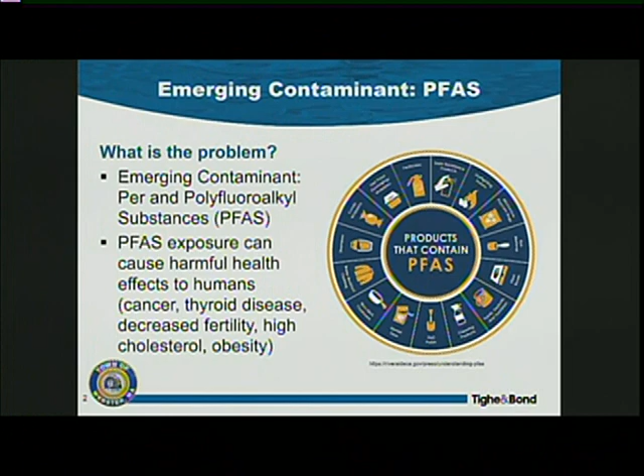Massachusetts has drinking water regulations for these substances found in drinking water, and that regulation limit is at 20 parts per trillion. To give you perspective on that number, a part per trillion is one droplet of water in an Olympic-sized swimming pool, which is 660,000 gallons. So it's a very, very, very small concentration that we're trying to detect here.

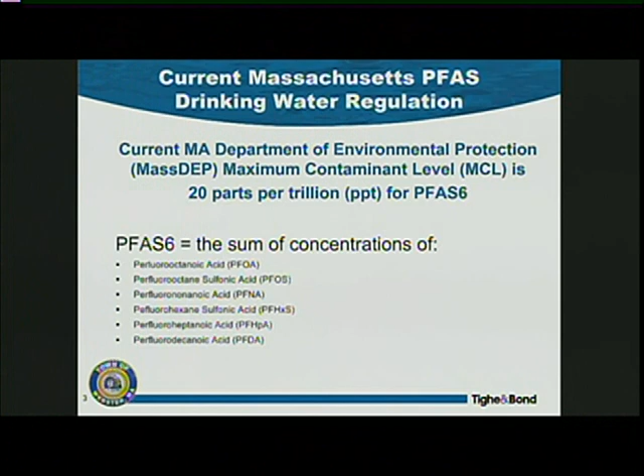For Massachusetts, the 20 parts per trillion limit is the summation of 6 specific PFAS substances, and there are thousands of these substances, but Massachusetts is currently just regulating the sum of 6 of them.

EPA recently came out with a proposed national primary drinking water regulation, and that was in March of 2023. As you can see from this table, there are 2 compounds, PFOA and PFOS, for which the proposed maximum contaminant level is 4 parts per trillion. That is significantly less than Massachusetts' current standard of 20 parts per trillion. But also keep in mind those are single substances, not the combination of all 6.

The EPA proposed standard also has a hazard index of 1 for 4 different PFAS substances, and those are a health-based related fraction, so it's a calculated MCL. Those are proposed to be less than 1.

These proposed regulatory limits set by EPA are currently open for public comment, and that public comment period will be ending on May 30th, 2023. We anticipate that it's probably another year before these regulations become finalized, at which point Mass DEP will then update their maximum contaminant levels, and those will be at least, if not more, stringent than what EPA's maximum contaminant levels are.

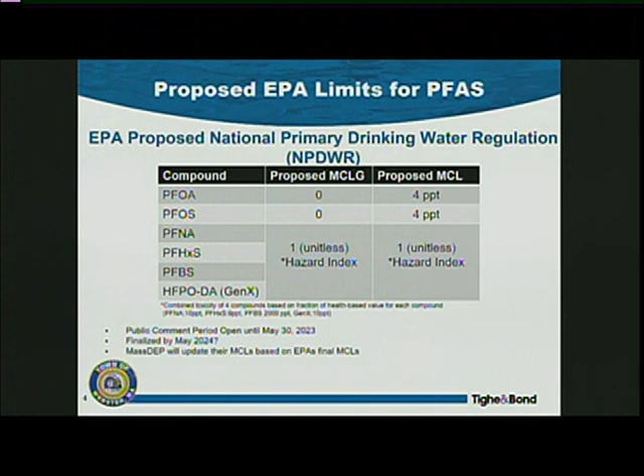EPA's current standard for PFOA and PFOS is 70 parts per trillion, which has not been exceeded in Webster, but Webster has exceeded the maximum contaminant level for Mass DEP at the Bigelow site in the raw and finished water.

But that well has been offline since August of 2022, is that correct? Correct, yeah.

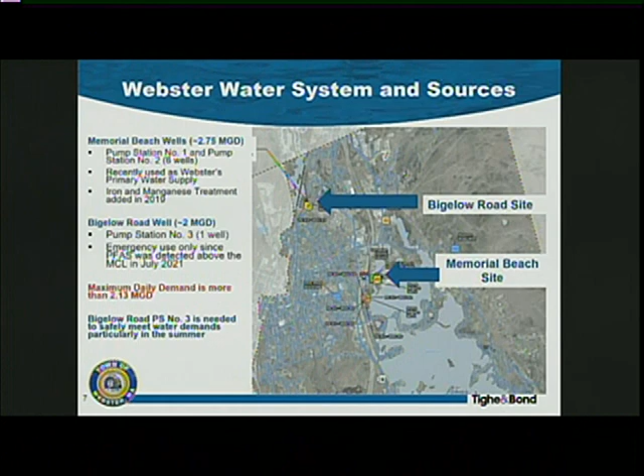In addition to PFAS, there is also iron and manganese at higher levels at the Bigelow site, which currently doesn't have treatment for iron and manganese. These are 2 common elements found in the Earth's crust, classified as secondary water quality parameters.

Iron and manganese in dissolved form, when they oxidize, cause precipitation, resulting in discolored water and buildup on fixtures. Currently, the raw and finished water exceed the manganese secondary maximum contaminant level of 0.05 milligrams per liter, but it is below the iron secondary max contaminant level of 0.3. Iron and manganese would need to be removed prior to PFAS treatment at the Bigelow site.

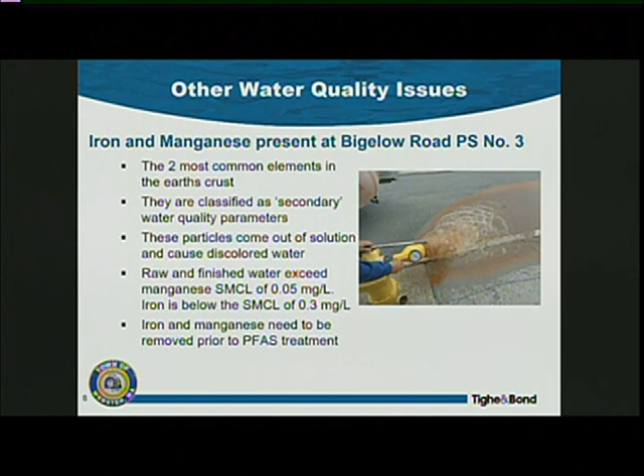The plan is to construct 2 water treatment plants, one at each site: one at Memorial, adjacent to the existing water treatment plant, and one at Bigelow. That also includes iron and manganese pretreatment.

The method of treatment for PFAS that we'll be designing for is granular activated carbon. With this method, the water will pass over the granular activated carbon and adsorb the contaminant, the PFAS.

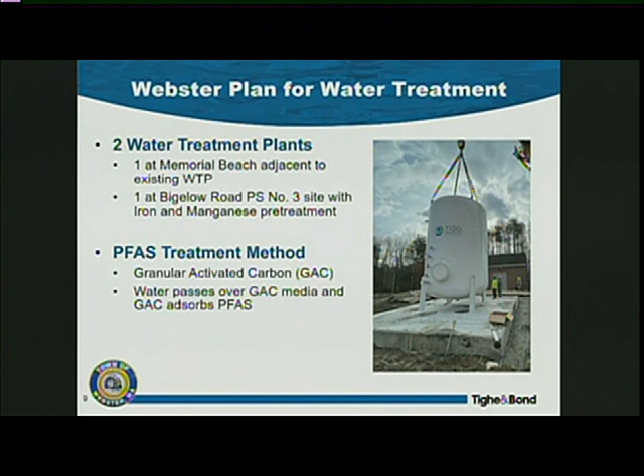Bigelow Road will have removal of PFAS as well as iron and manganese, and will provide the necessary redundancy for the town, especially when water demand is high in the summer months. Memorial Beach water treatment plant will be for removal of PFAS.

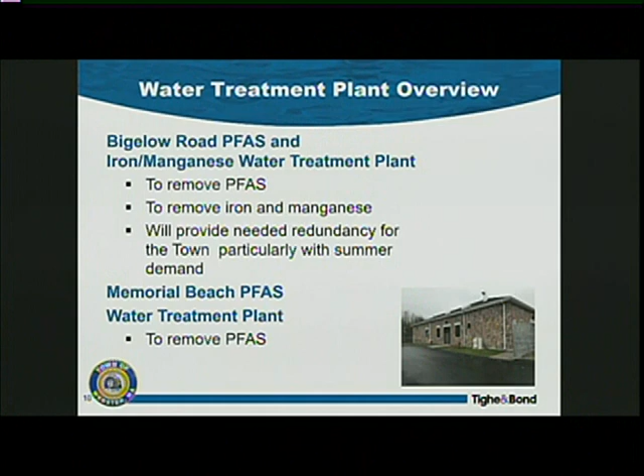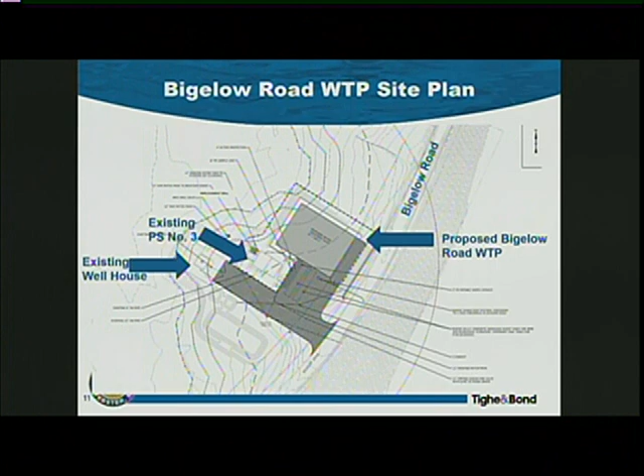There will also be some underground tanks for backwash wastewater, and we'll also be installing a new replacement well for redundancy in order to get that capacity.

These are a couple renderings of what the proposed plant might look like. We have a couple of elevation views, and on the upper left corner, you can see the new proposed building in relation to the two existing buildings on site.

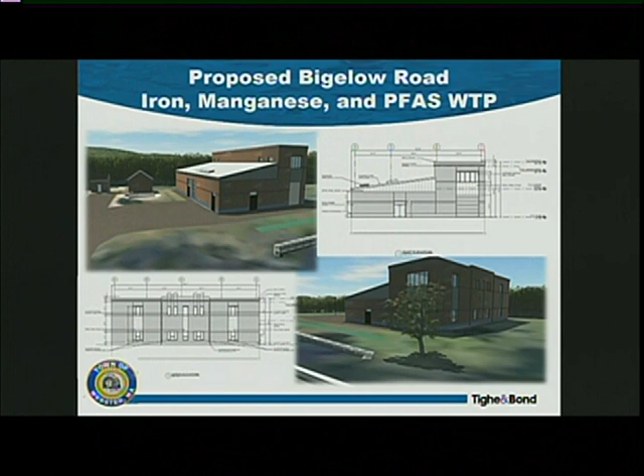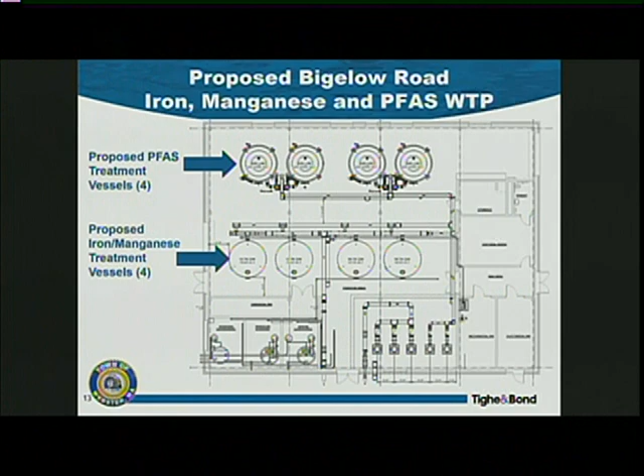Here's a proposed site plan and floor plan for the new building. Prior to entering this building, water will go through an aeration tower that adjusts pH prior to the GAC filters. It will go through the green sand, or biological iron and manganese filters, to remove the iron and manganese, and then travel through the GAC filters for PFAS removal.

This is the proposed site plan for Memorial Beach. Again, the gray rectangle is the proposed new building, and there's an arrow showing the existing building on site. Those rectangles in front of the building are for stormwater controls. They'll collect stormwater from the site, but will be installed below the driveway, so you won't be seeing them on the site.

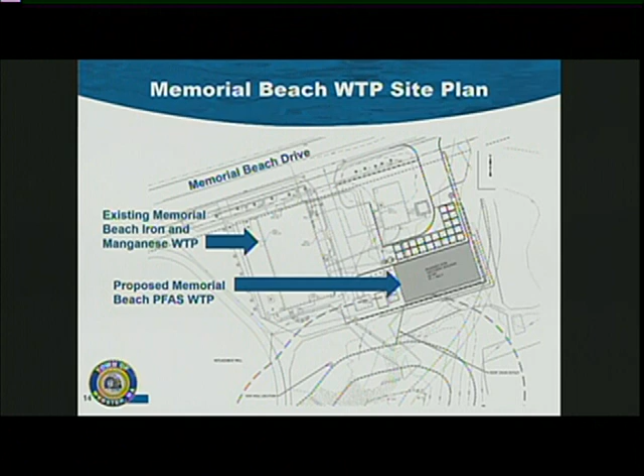Here are a couple renderings of the proposed building in relation to the existing building. The PFAS filters are a lot taller than the filters needed for iron and manganese removal, about 28 feet. So you can see the building height is a little bit taller compared to that existing structure.

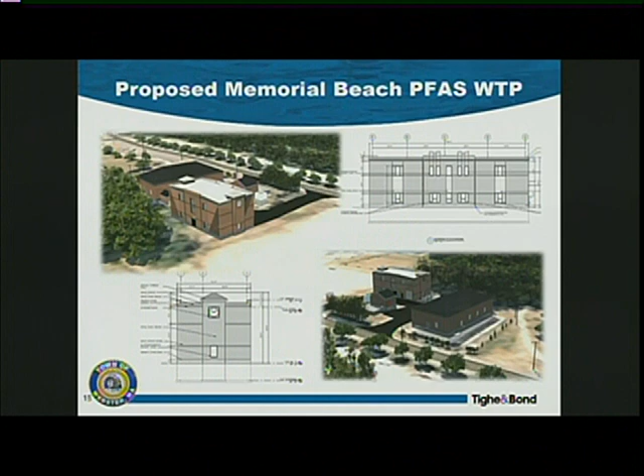The proposed Memorial Beach floor plan is a lot simpler because it's only for PFAS removal, since the site already has iron and manganese removal. So we'll be using the existing facilities for the packed aeration tower, followed by the green sand filters, and then through the GAC filters before it goes out to distribution.

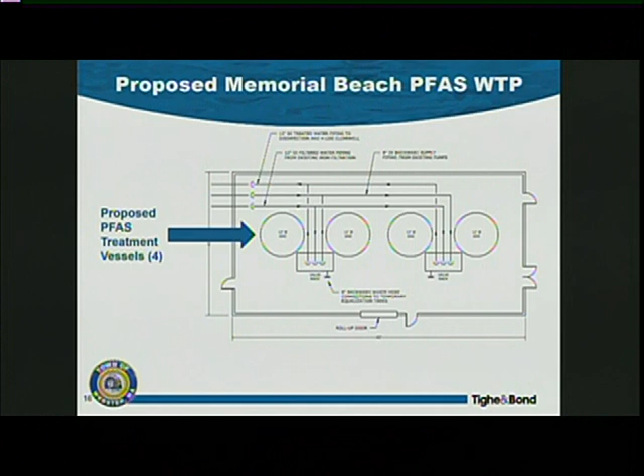As I mentioned before, the treatment technology for PFAS that we're looking at is GAC filtration. These filters have been installed and are currently being installed in several surrounding communities, including Dudley, Townsend, Dracut, Littleton, Tyngsborough, Acton, Groton, Pepperell, Hudson, and Stow.

The other technology we're looking into for iron and manganese removal - there are two options we're considering now: Greensand Plus filtration or biological filtration. We are currently doing some pilot testing, which is actually going to start next week, to determine which one is the best option for our water quality.

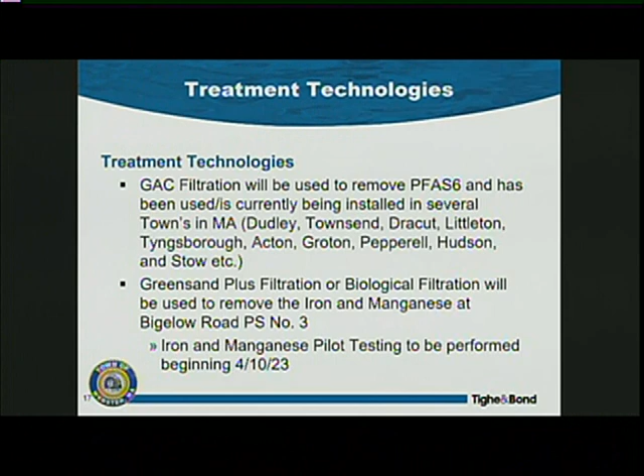So the project funding approach - we submitted an application into Mass DEP State Revolving Fund. Webster did make the draft intended use plan for this project, so it is proposed to be funded through SRF. The SRF loan is a 20-year construction loan with 0% interest, and there is the opportunity for principal forgiveness, which we believe right now would be a minimum of 19.8%.

We won't know exact numbers for some time, but we are currently awaiting the final IUP list to be drafted. And Mike will be presenting on the water rate study after this presentation.

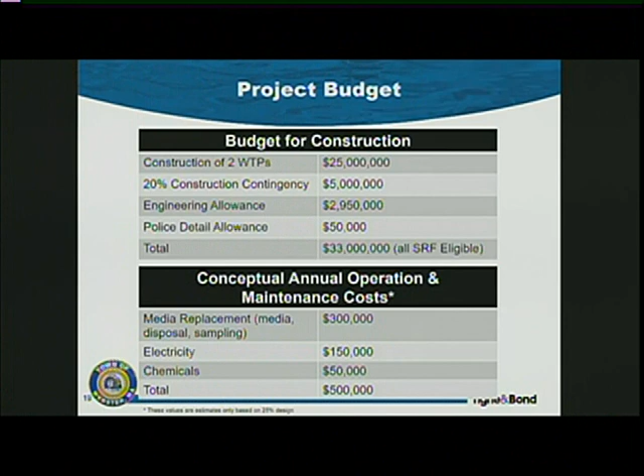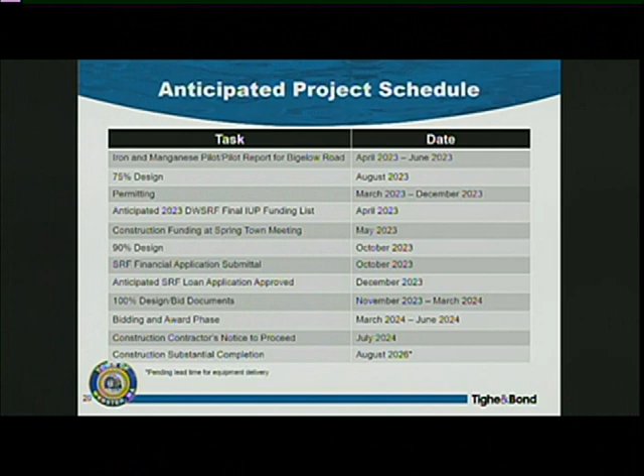I just wanted to note that the Webster Water Department has been very diligent in keeping up with all of these new regulatory compliances for PFAS, and really, Webster is ahead of the game. EPA just released their proposed regulatory limits in March, and because of the diligence with managing this PFAS mitigation plan, Webster is already in the design phase and has been set up nicely for procurement of the construction funding. I just want to thank everyone for their time, and I'll open up for questions.

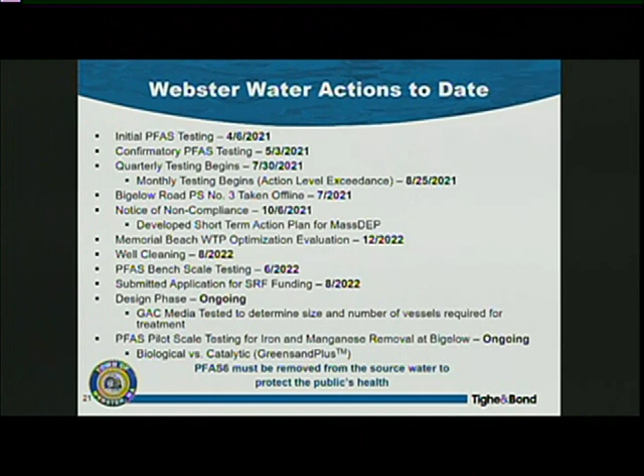Question: When the treatment plant was implemented, how much of the PFAS would be removed? We are anticipating we can get down to 0. We don't know for sure, but that's the intent of the design. In order to meet those changes and whatever the regulatory limits are, the effect that will have on the plant is that you will just need to replace your media more frequently. Does that answer the question?

I thought I had originally heard that the federal limit was going to be 0 parts per trillion. Are you saying that they came out with a 4 instead? So the maximum contaminant level goal is 0 - that's what the goal is, but the enforceable limit is the 4.

And what happens - so they're going to, you're estimating that they might start enforcing this in 2024? We won't have our plant done for 2 years after that. So what would the potential be?

So currently the Memorial site has lower PFAS concentrations, and they're below the limits at this point, so that will be used until we can get the plant constructed.

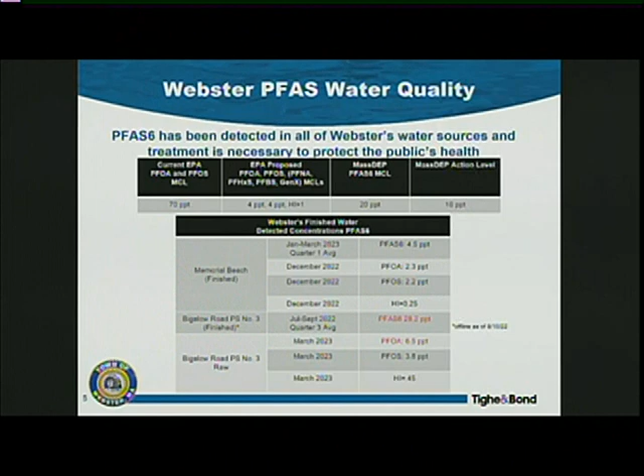Danielle, isn't the EPA standard targeted for 2026?

So they haven't even proposed the standard officially yet. They have to have hearings, and after the hearings, the target date is 2026. So we'd have till then to get the plant in place, and we've expedited this, but essentially the plant would come online just about the time the standards would come into play, assuming that timeline doesn't slip for the EPA.

Does that sound right? Can I add a little to that? Jeff Faulkner, also from Tighe & Bond. The way federal regulations work is right now it's in draft mode, and then it becomes final, but there'll be a compliance period after that. So we don't know exactly when, but Webster's not alone—there are literally hundreds of thousands of water systems across the country that are going to have to do this, and they're going to have some compliance period.

And the last question I had was, it sounds like we're measuring 6 of these components added together. Are we going to be able to measure the individual ones, because the federal limits are for individual components? Right now those lab reports do come back as individual compounds, and they're just added, so yes, we will be able to. If you review our annual CCR, we posted those other limits. Obviously they're still unregulated, but they are on our annual CCR.

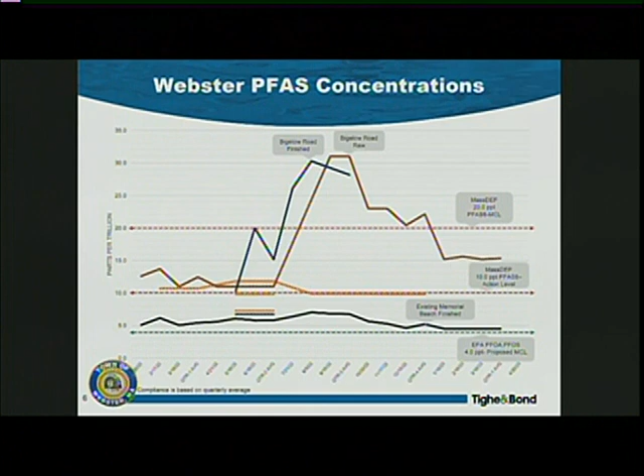Before we do the next presentation, I would like to open the public hearing. We need a formal motion to open the public hearing for the 2024 water and sewer rates. Second? Okay, then we open the public hearing, and we'll start with Tighe and Bond doing the rate study presentation.

Thank you. My name is Mike Schrader, also with Tighe and Bond, and I'm here tonight to talk to you about the water and sewer rates and the evaluation we just completed.

So, let me... oh, that's good. Okay, I'll do it the old way. Don't forget to speak into the microphone, please. Even with my booming voice? That's right. Okay, alright, I'll sit down, I'll make it easier.

So an overview: the town of Webster owns, operates, and maintains public water and sewer systems to serve its residents and businesses. Like many New England towns, Webster's infrastructure is old, almost as old as the town. The original water system was built in the 1800s, and the town has been proactive in maintaining, evaluating, and improving the infrastructure, with the goal of providing a level of service that you require, both from a customer perspective and a regulatory perspective.

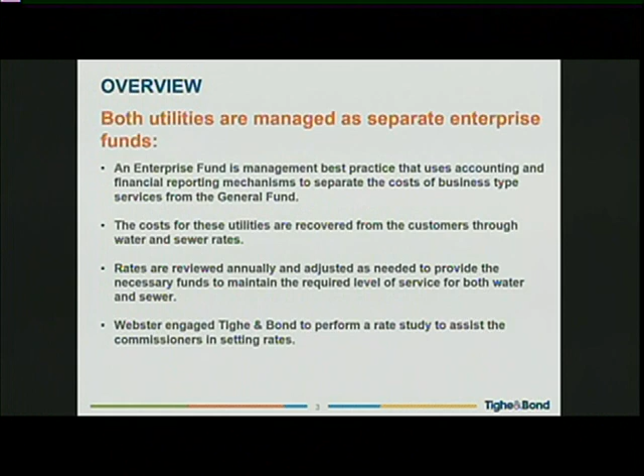In this case, Webster engaged Tighe and Bond to perform a rate study, partially because of the number of capital projects we've just been talking about. When we look at water and sewer rates, it's basically built around a pro forma, which is essentially a cash flow diagram. We look at past expenses, some historic, and then project going forward.

For the expense side, it basically comes down to operating expenses, existing debt, and capital improvement projects, which are both debt and non-debt funded.

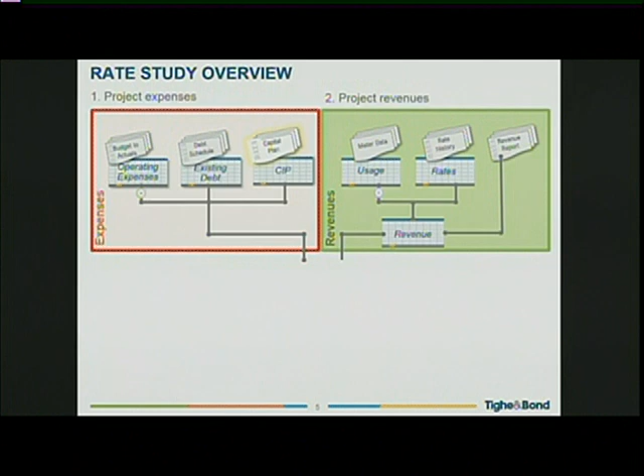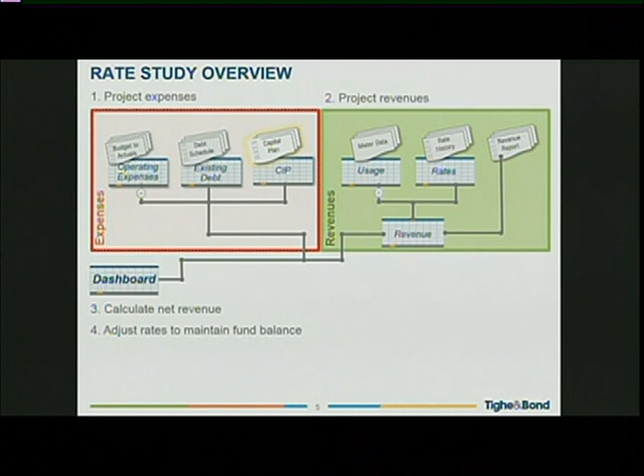Then we look at the revenues, which come primarily from water usage, and what the trends have been in water usage and the volume of water used. We look at the rates, and this is an illustration of the electronic model we use to do this. We pull them together and calculate the net revenue, looking at what revenues and expenses look like going forward, then adjust rates to maintain a fund balance that's equitable to the town and can provide a buffer in case of unforeseen changes in usage or expenses.

Capital expenses are the biggest driver of rate increases, and in general, the size of the system or the number of customers is what sets the overall cost. Webster is fairly fortunate—you have a fair amount of customers, and it's almost equal for water and sewer, which is helpful.

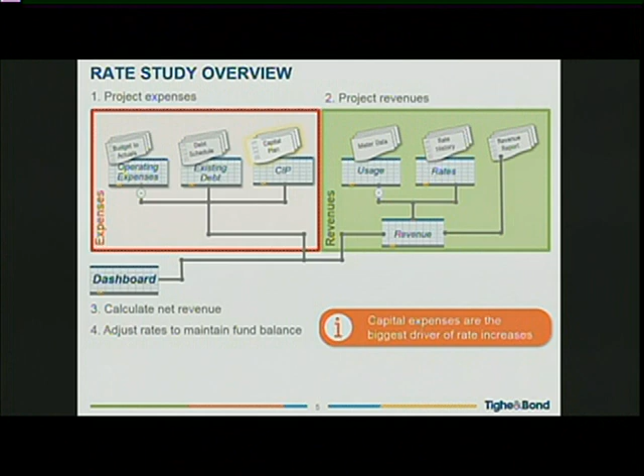This is just a summary of the expenses we look at projecting forward. The bottom is operating expenses—salaries and benefits for the water department workers, electricity and fuel, operation and maintenance, chemicals, et cetera. It's basically everything that goes into maintaining and operating the water system.

Like everything else, those costs are going up as well. We're dealing with things that are harder to get, or delays in production and availability. So we forecast—we try to be conservative and realistic, but you have to find the balance between practical and overreacting. We make conservative estimates going forward.

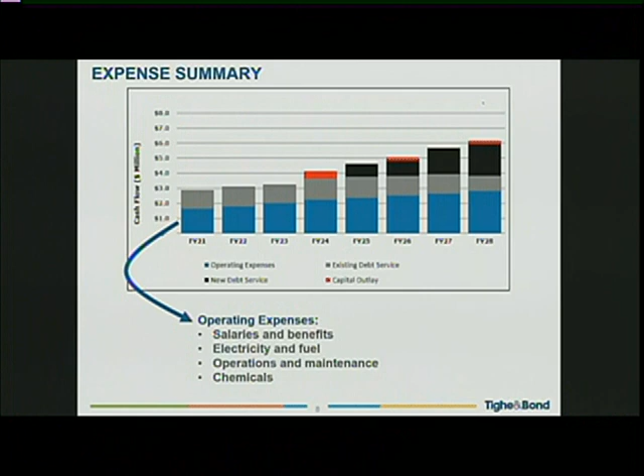The top here shows the capital expenses coming. The black is new debt for debt-funded projects, primarily the water plant we're talking about, the PFAS project. The red is other non-debt capital investments in tools, equipment, and smaller projects that are needed.

To project those expenses, we maintain a capital improvement program. This shows everything from smaller items like maintaining fencing and security at water tanks, a pole compactor, all the stuff required to operate a water system. The bigger one, as we were talking about, is the treatment plant for the PFAS—it's the two plants.

The interest rate is 0%, which is the state's way of funding and helping to combat PFAS. I don't know if we want to call it an epidemic, but this new contaminant—Webster is fortunate because as they lower the limit to 4, as Jeff alluded to, a lot more systems are coming forward, so it's good to be in line now.

What we were talking about before is the 19.8% principal forgiveness, which Webster gets because of its economic status—they have a 3-tier system. What we were alluding to is there could be more, in addition to that, but we don't know what else. Sometimes previously ARPA money came in and helped with some projects.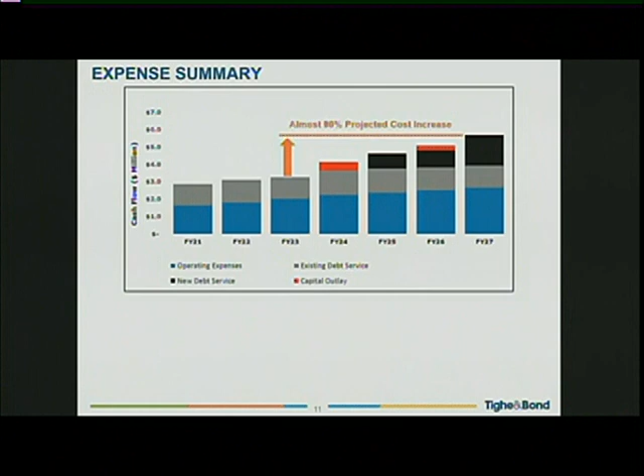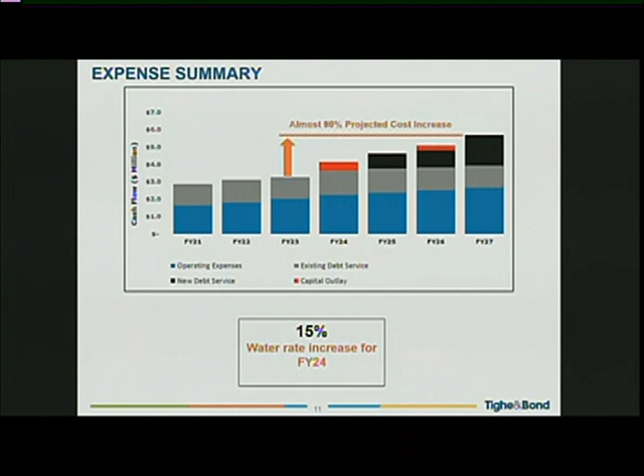When we add it up, it's almost a 90% increase in expenses from '23 to '27. What we're planning for right now is just a 15% increase for FY '24. You balance what we see right now with preparing for the future, adjusting it every year based on actual water use, actual expenses—if you get additional funding for the PFAS plants, the needs will go down.

And what that looks like is these are the rates itself. At the end of the presentation, I'll show you what the projected cost impacts are for what we call a typical residential customer. The rate structure currently is a 2-tier, essentially a base charge of $36 and then a usage charge once you go over that. There's a 20% discount for senior citizens, across the board for water and sewer.

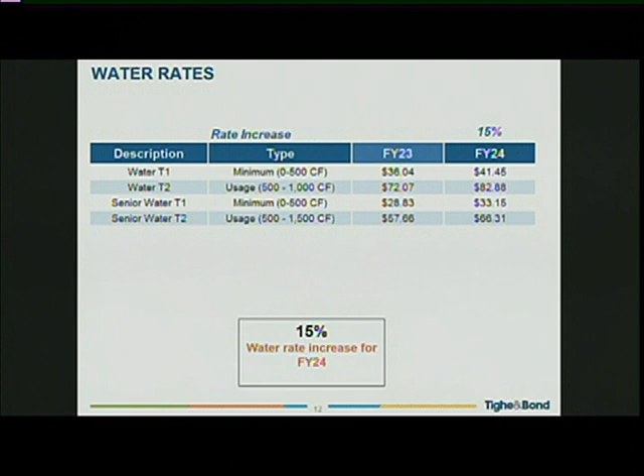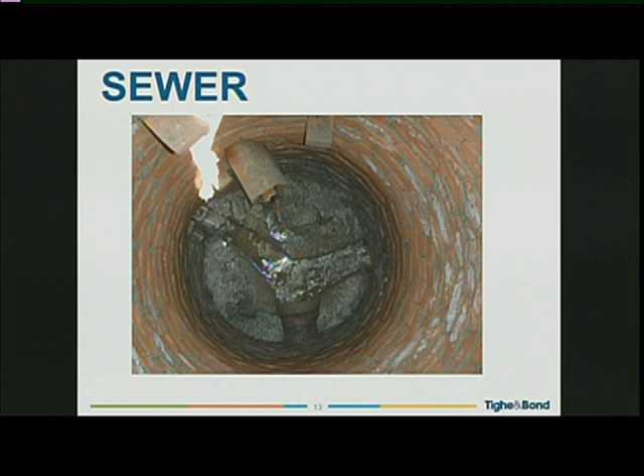So similarly for sewer, that's a lovely picture my associate picked, but that is a sewer. I usually just show a manhole, but sewer, by its nature, is more expensive. There's more parts to it, it's just more expensive in general.

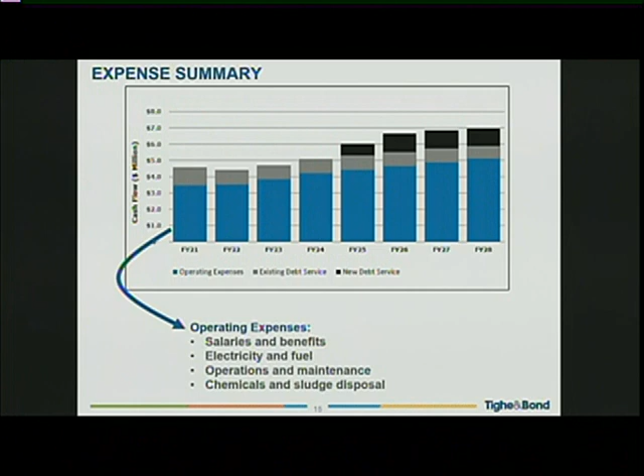So you can see the operating costs are a little bit higher, and similarly there's some capital costs coming. The operating expenses are really the same as they are with water, the different chemicals, et cetera, but it's the same kind of concepts. And again, there's new capital expenses coming.

There's an even longer list for sewer, but they're smaller, a lot of smaller items, rebuilding pumps, and like I said, when we talk about asset management, think of it as a constant state of decay. Things are always wearing out. Wastewater is a very harsh service environment, and things tend to wear out.

So this is an example of keeping ahead of them. There's some good proactive infiltration and inflow projects in here to reduce the amount of water that basically leaks in from groundwater, from rainwater, from connections, and just costs more money to treat at the plant. So the goal is to keep that out of there and keep on keeping on.

We have some aeration upgrades at the plant that are planned, much smaller in cost than the water project. So this is over a 5-year period. It looks like a lot, but given the size of the system, it's pretty manageable. So again, looking at roughly a 50% cost increase.

And the town had had some big investments in sewer previously, so a lot of it is maintaining and keeping up with the upkeep of the plant. Sometimes I think of it like an old farmhouse, that by the time you get around doing one thing, it's time to do the windows again, and you just keep going around and around. By being proactive, it reduces overall cost because emergencies cost more, and you can control your cost by planning it.

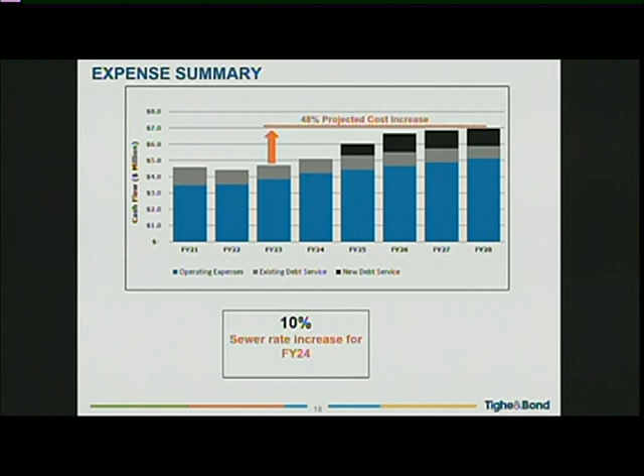So the projected sewer rate increase for FY '24 is 10%. And again, those are the sewer rates, showing each component. It's very similar—there's the same tier, and then a discount, again 20% for seniors. There's also a flat rate for people that don't have town water.

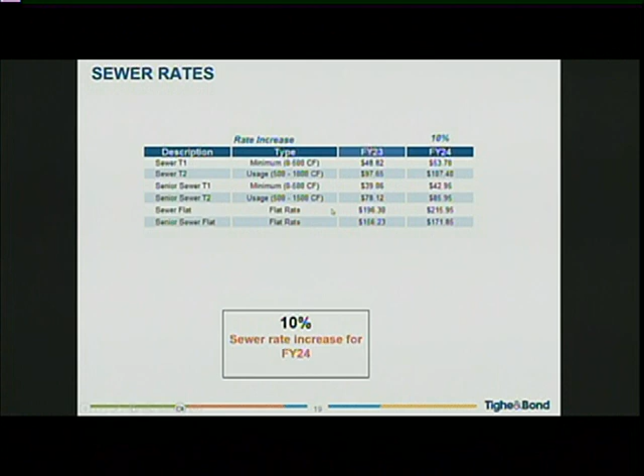So when we look at what the cost impacts are, this is actually always interesting because we don't want to use an average water use. I like to show what I think of as a serving size, what it might cost your family for water and sewer, based entirely on your usage. We actually look at the town's water use records and try to come up with something realistic so that we're not overstating or understating what the cost would be.

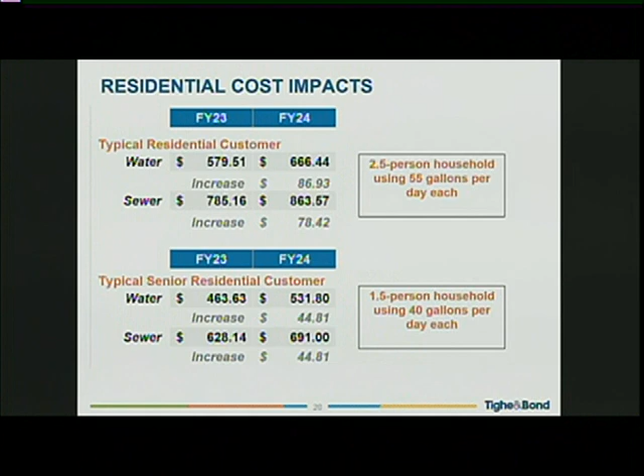So under water, for the typical customer, it would be about $86 over the year, the 4 quarters, and for sewer, about $80. And for seniors, it's more than the 20% discount because we're also using less usage for the illustration, about $45. So that is, I think, the last slide.

If anyone has questions on that, we can go through it. Like I said, when we went through it, they're doing a good job. There's a lot of moving parts, but in general, it was pretty manageable.

One thing I'd like to point out on the water side is that projection of expenses also includes the water pipe replacement project along the way every few years. Not like we're dropping that project. One of the problems with infrastructure in America is a lack of funding and commitment. The commission has made a commitment to maintaining a replacement schedule. You've got some very old pipe in town, like all in New England. There's a replacement, another replacement, and a third water main replacement, and this is only a 5-year capital plan. It's never ending. You just keep chipping away at replacing and maintaining the system.

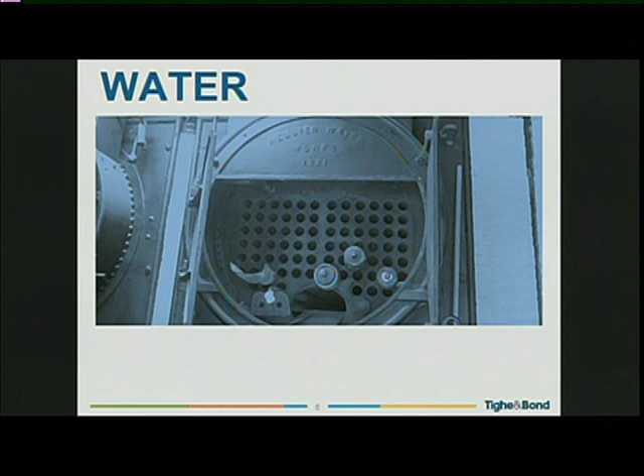Now, we still have a meeting, so if folks want to stay, we're going to go to our regular meeting and go through the issues there. I guess the next item is to discuss the...